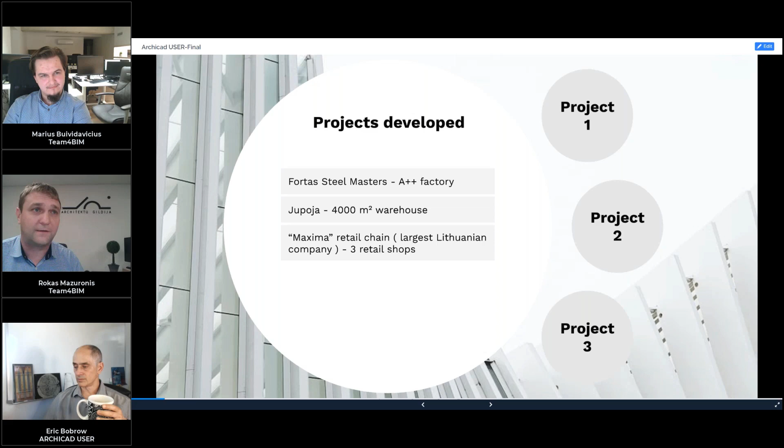This is just some basics of our use, we're not expert in that. Our company consists of two parts: one works as an architectural company in Lithuania, and another part called Team4BIM, which is why we are gathered today, provides drafting and BIM modeling. Our staff also take part in some of the Lithuanian projects, so they see in our office how those working meetings go, and they understand that everything starts with a drawing but doesn't finish with the drawing. I think that encourages them to get a better mindset. So these are some projects of our company that we did in Lithuania.

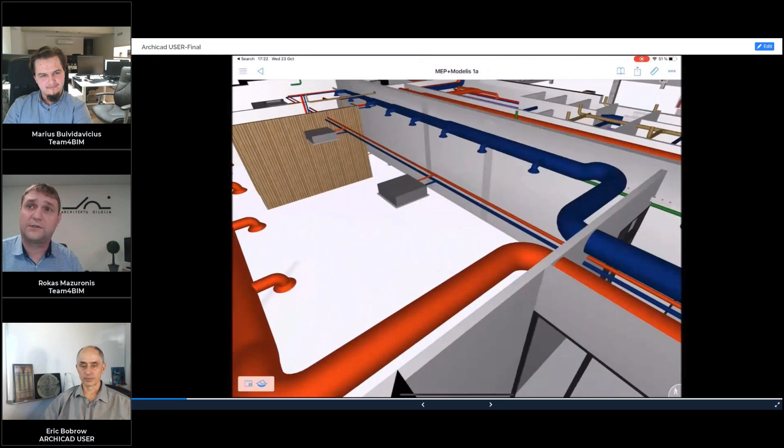We also use all these Archicad tools to implement them into the real world. For example, in Šiauliai, Lithuania, we built a manufacturing factory, and we also did an as-built model because many engineers used and worked just in 2D, they did not use Archicad or any other expensive software. So during that project management, we as architects received information from engineers and compiled it into one IFC file.

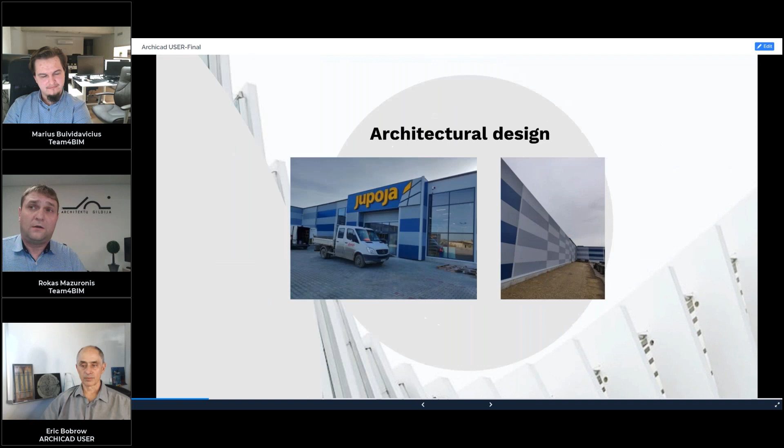So this is another of our projects. I just wanted to show that we are doing quite serious projects, big, a few thousand square meters, and we are using this software and these Archicad capabilities.

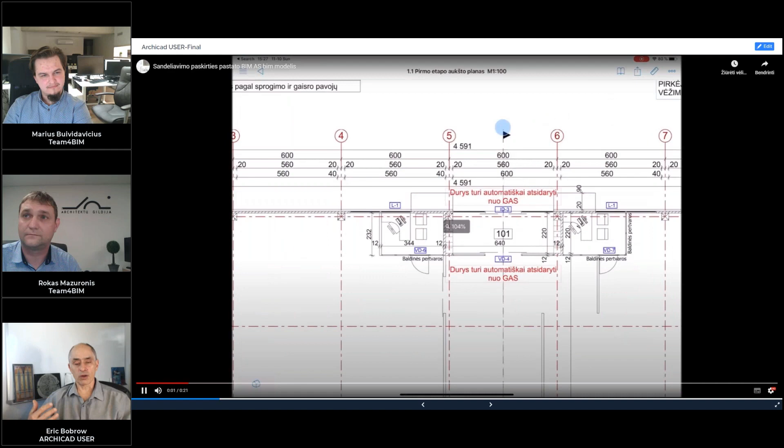Before you go on, I just want to point out for those looking at the graphics and wondering how you produce some of those things: some of what you're doing here is just available when you take your Archicad project into BIMX. Not all Archicad users are even familiar with the fact that BIMX exists and that it's included as part of your Archicad package. But the fact that you can go from a 3D view to a plan or elevation in a nice transition to make clear what the drawing is about, and even slice through the building interactively, is a wonderful part of BIMX, and it communicates the context of the drawings.

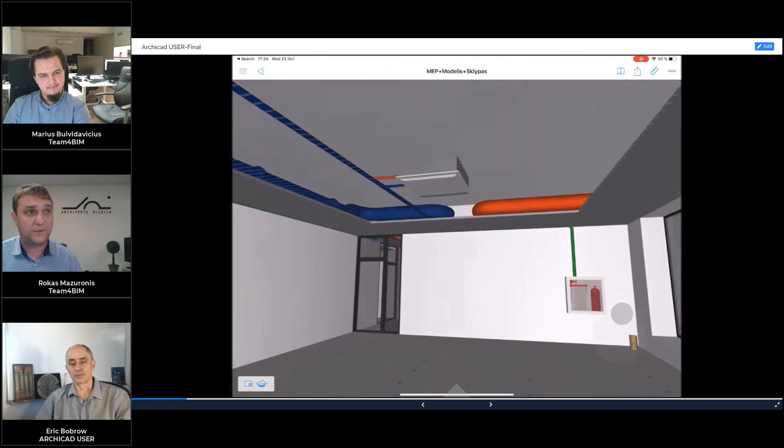For this example, we did that BIMX file and underlaid the original engineering drawings under this IFC model, so the client could see the original drawings which were signed by the engineer, and on top he could see that 3D model of all MEP systems with attributable information to make it clearer for him how that works.

So in this case, you modeled based on the drawings. The drawings had been carefully done by the consultant and were designed to fit into the architectural space. But then, as part of the coordination, you modeled the ductwork and things so we want to avoid clashes, we want to make sure everything is going to fit together.

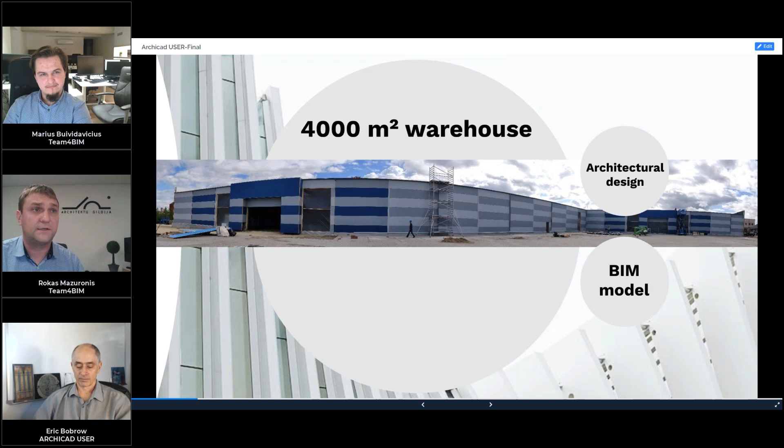Yes, because we wanted to gather the engineers who have the best knowledge and the biggest experience, but somehow they don't use very advanced software, and young engineers use software but have less experience. So on this project we tried to take more experienced engineers and use our own Team4BIM services to gather all information as a whole, and during construction, since we were supervising the whole building process, we also managed how those systems changed. Afterward, the owner of the building received that BIMX file with a brand new tablet, and he was very happy to have received all documentation in that form.

Do carry on, I'm getting a call from Patrick, he must be having a problem connecting up. Okay, hey Patrick.

So basically, these are also our Lithuanian projects. As an architectural company in Lithuania, the biggest retail chain is called Maxima. We are doing small commercial buildings for them.

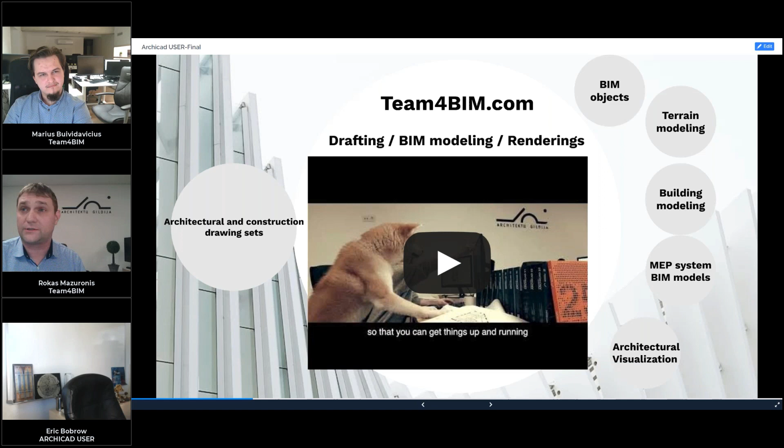As Team4BIM, the main services that we provide are objects, terrain models, building modeling, MEP systems, and also drawing, architectural and constructional sets. So basically, this is a short video of our company.

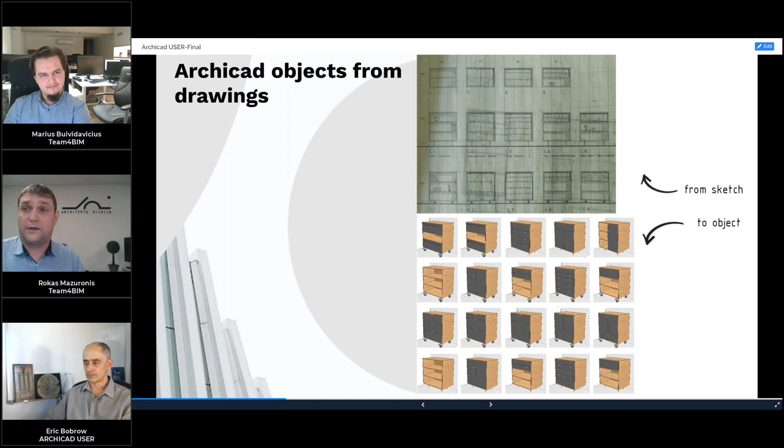So one of the services that we are providing is modeling non-GDL based, non-parametrical objects with attribute and material information attached to them. For example, we can model these objects from a manufacturer specification, or sometimes we also worked with manufacturers who wanted to have their object library in Archicad to provide it to interior designers. So we also created those models.

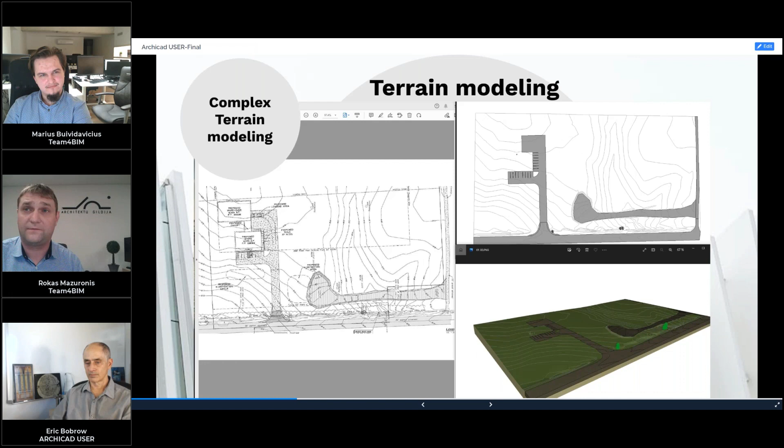Another thing that our services can expand capabilities and save time is terrain modeling. For example, we sometimes do terrain modeling just from scanned PDF files. Also, we work with architectural ideas, and then from sketches we attach pathways, drive-throughs, and in that case we can create really complex terrain models, which can be extremely time-consuming for architects themselves.

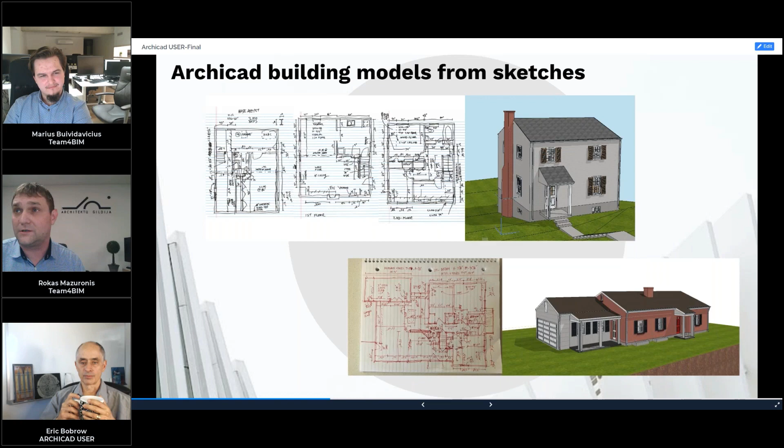We provide building models themselves, basically from sketches. The architect can send us a sketch, or even the person who wants to have a model of the building can send us a sketch with basic measurements. It can be in metric or in the US system, in feet and inches, and based on that we can create Archicad models.

We also create Archicad and terrain models from point cloud data, and we can also connect that point cloud, resample it, or if a client sent us an already prepared one, it's a bit faster.

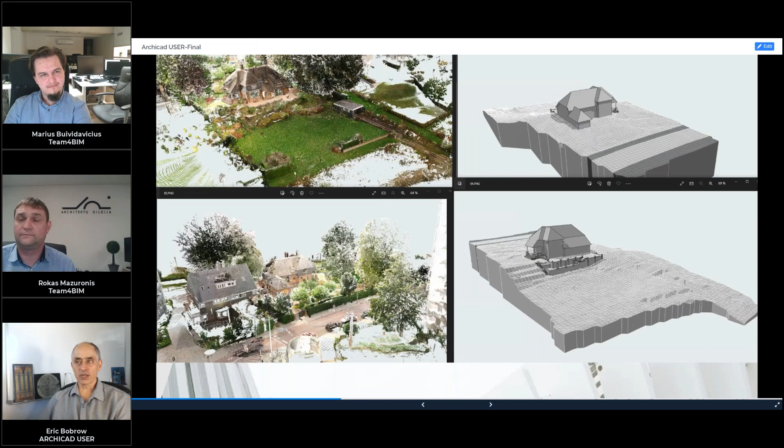Just a moment, I want to clarify for those of you on the call who don't know what a point cloud is. A point cloud is a collection of data that comes from a certain type of scanning. There are different devices that do this, but basically they all have in common: a device is placed somewhere, it looks around at the environment, and gets data about where the solid surfaces are. In most cases these days, it's actually giving color, saying this is brown, this is black, this is white, etc. Now that point cloud is basically just a bunch of little dots, and you can see in the upper left here, this thing that sort of looks like a pointillistic, impressionistic painting, much like the old, well, not surreal, but pointillistic ways of depicting something in painting.

Now you can actually move around these things because it is a 3D model. They'll typically take multiple viewpoints to get a more complete scan of all sides, but it's not solid, and it's not something that you can actually get drawings from.

So one of the things that is required is either automatic, with some tools, but more manually, just a service, whether it's your own in-house team or Team4BIM, goes and traces this and makes an Archicad or BIM model that actually closely matches what the as-built conditions are.

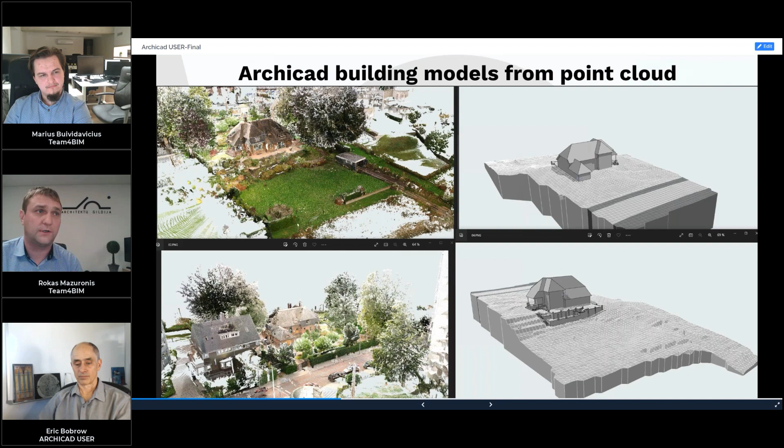Sometimes there's a need to have a model based on old blueprints for renovation, historical reconstruction, or even for building maintenance purposes. So we do models for these types of things as well.

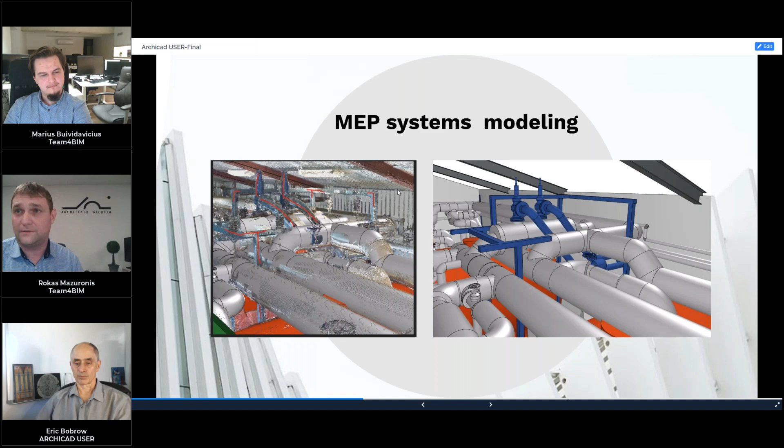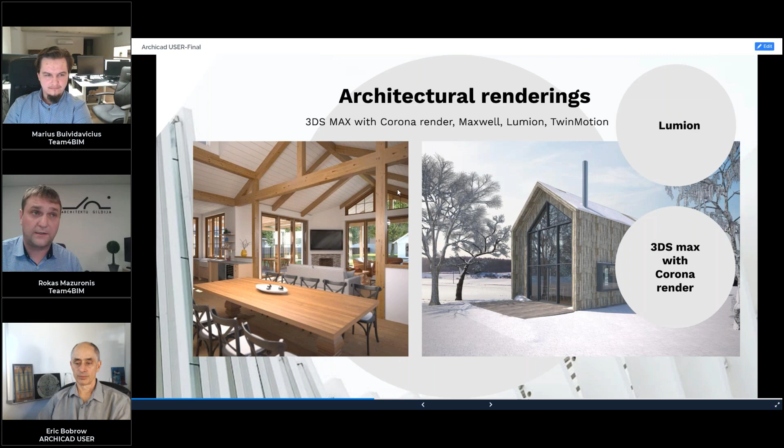Another layer of our services is producing renderings. For daily renderings we can use Twinmotion or Lumion. Usually when a project reaches more finalized stages, it requires a higher quality of rendering for marketing purposes or final presentation to the client, so we also provide renderings with 3DS Max and Corona render.

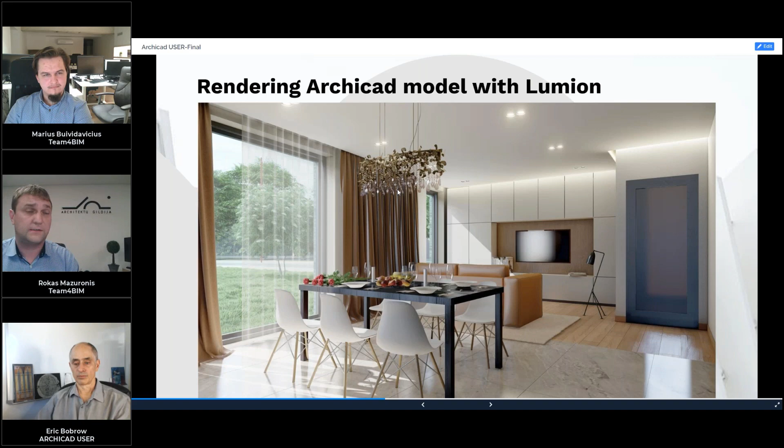As people work with our company, we can help them expand their scope of software beyond Archicad and Twinmotion on a daily basis, compare results, and choose the end result that's most suitable for them.

And also based on those models, as a final stage, based on architectural lead architects' input - because I want to underline one main thing: on these projects, we are not working as architects and we are not working as engineers. We are working as an additional part of their team who helps convert their ideas and proposals into modern Archicad, Revit, BIM files - this is our architectural and constructional drawing set.

Also, as we create the model, if there's a need to model it further based on the red lines and sketches of details that we receive from architects, we can also develop annotated and finished drawings. And I'm very happy that we had...

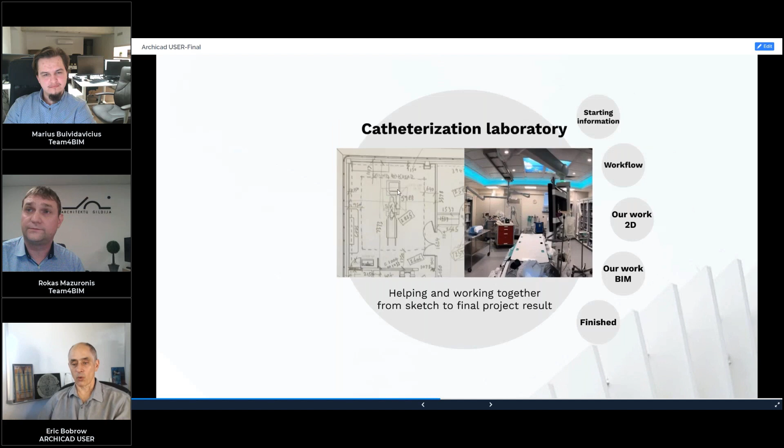Yes, I'm back. Yes, I've worked very successfully with Rokas and his team for a number of years, and that worked exceptionally well. He's brought up a project here that I was going to talk a bit about, and show some pictures of later on. So yes, it's been a very good working relationship over the years.

As Rokas said, it's a team approach. His team there, I saw them as my team as well. As we worked on projects, it wasn't a matter of outsourcing something to somebody else to draw with little involvement - there was a dialogue backwards and forwards, just as there would be with any staff member working in your office. Just because the office is several thousand miles away made no difference whatsoever - we're still able to communicate exactly as we're communicating now with things and drawings, so it worked exceptionally well.

And Ian, I want to point out that the huge distance was not an obstacle to visiting us also and meeting directly in Vilnius.

Yeah, we had a couple of visits over in Lithuania for business meetings to discuss work, and you introduced me to using VR a little more, which worked very well. The face-to-face meetings were very good for me because there was a local airport I could get to in a couple of hours. Now they've shut that airport, it's a little longer, but hey ho, Brexit has its problems.

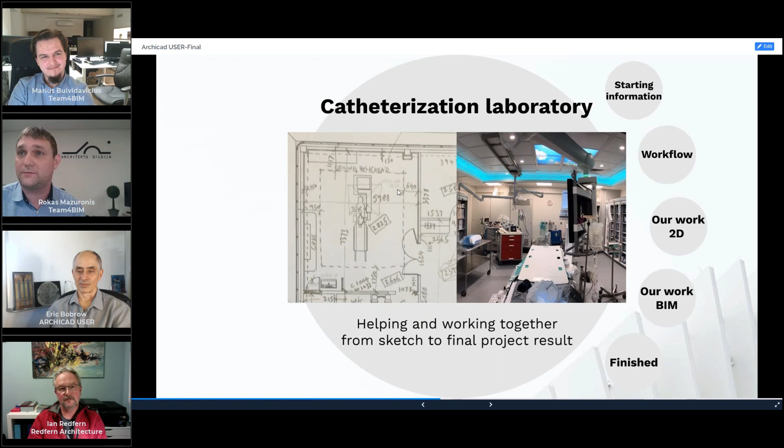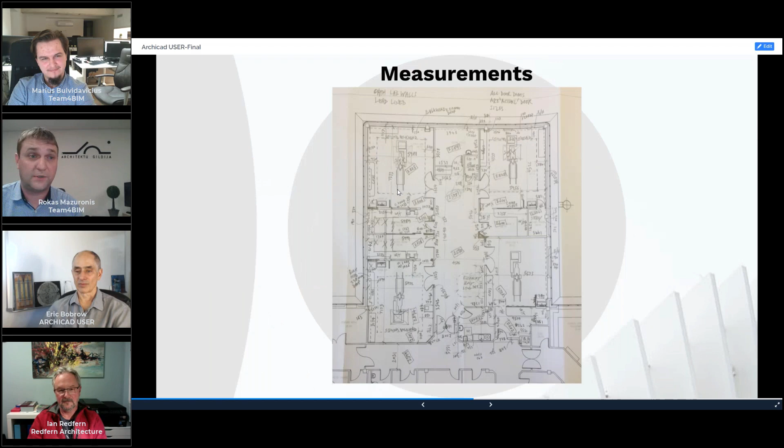So basically, as we worked with Ian, we received some starting information from his side - photos, sketches, measurements, 2D drawings - and as Ian pointed out, we worked as a team, as an expansion. He helped us, we helped him, it was mutual communication. At first there was maybe some learning curve, as in every partnership, but after that we managed to move a bit smoother.

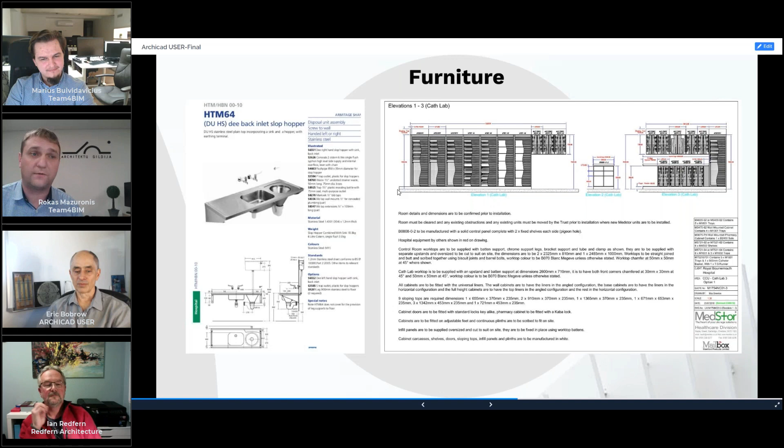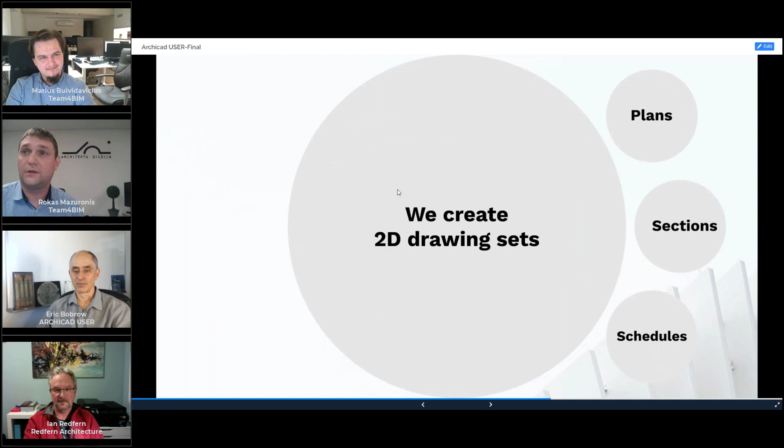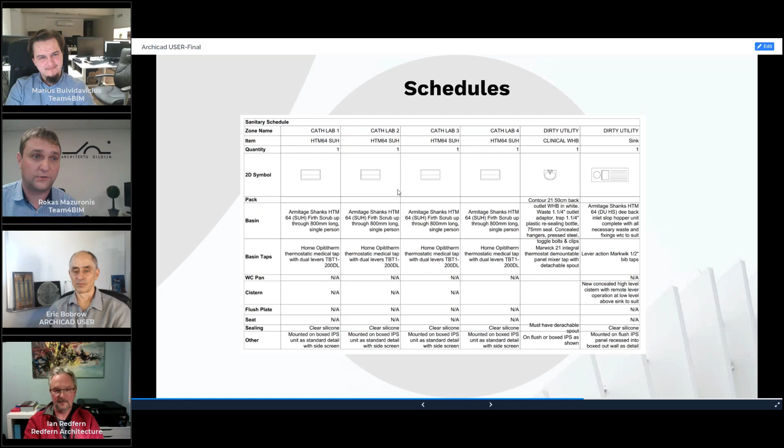We also received information about the equipment that was used, and did some modeling of that equipment. As work progressed we got pictures and equipment drawings, and based on that information we created plans, sections, and schedules. We also created a BIMX model for one of these projects, where you can go through all this quite heavy technical equipment and see it. We're very happy that Ian sent us a picture of the finished project, because it looks very nice.

By the way, it's very odd for me to see this room, this medical facility, because 1.5 years ago I had a heart attack, and they rushed me to the catheter lab, which is this type of room. Even though I was in California and this one is undoubtedly in Europe, UK, it looks very familiar to me because I was in it. Of course, I didn't see all of it because I was being wheeled in and wheeled out, but I recognize some of the features.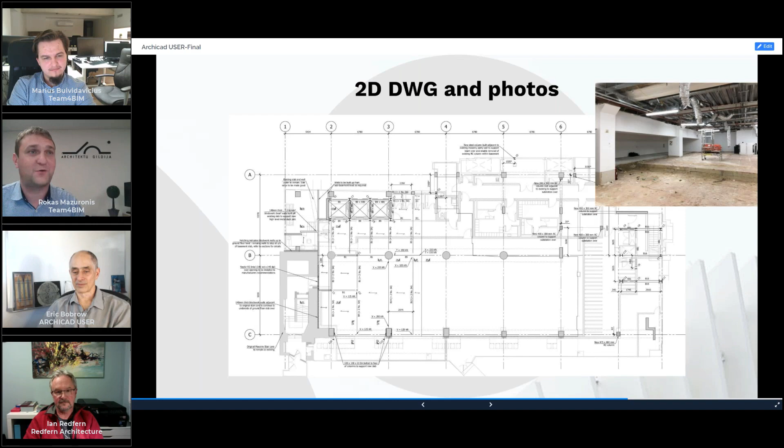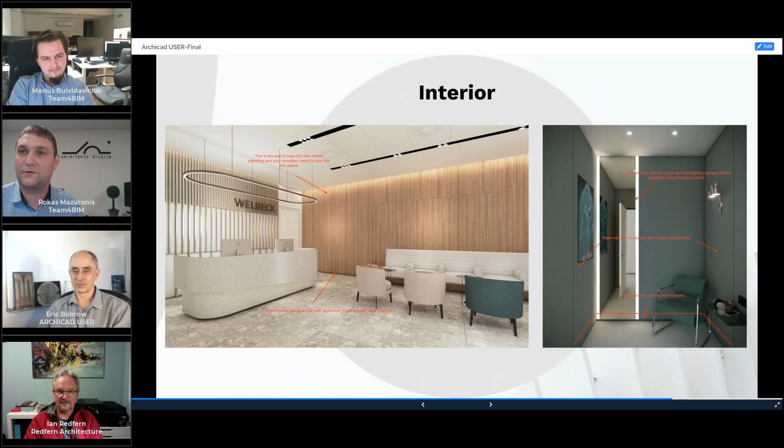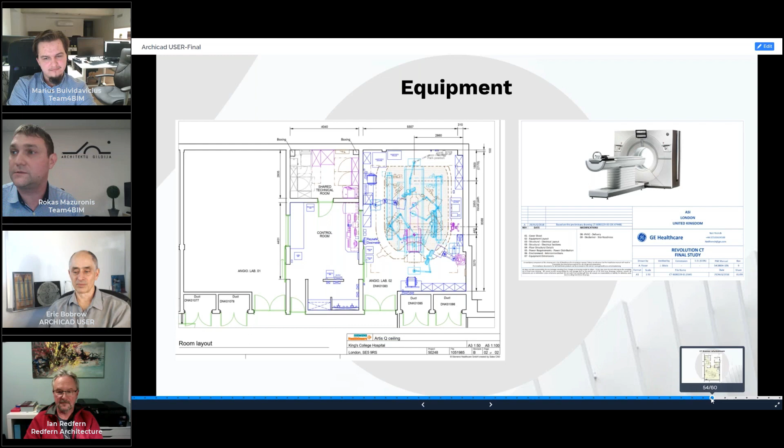We worked with some other projects too, but the principle was the same. We received information, did some modeling, drafting, communication, meetings, and worked under strict supervision of Ian. We received red lines and notes, and gathered all the information together. We also gathered information from interior designers, and based on that, did modeling of some equipment. This was our work in progress.

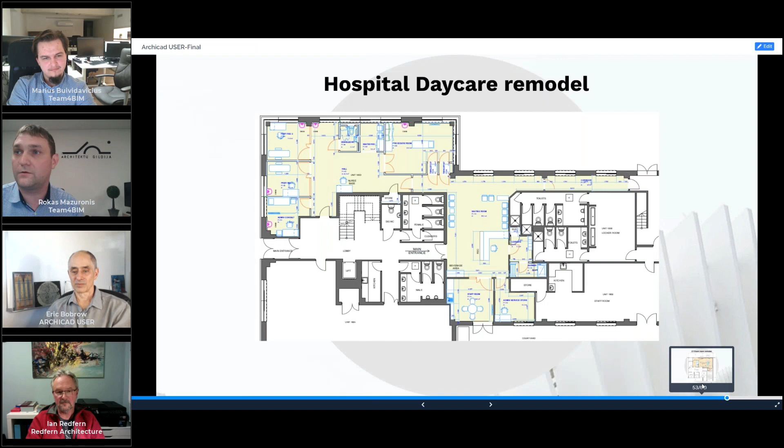We also produced the BIMX file where all the drawings are, and we had the whole list. I believe we had 11 or so projects.

This project, as an aside, working with Team4BIM, was an interesting one in terms of working with drawings—it makes you realize you cannot rely on information. I know you've talked about point cloud things, but I'm always a firm believer in double-checking. This job was originally drawn with a pair of Siemens scanners, 1.5 Tesla, sketched up by Siemens for their scanners fitting in. When I went to site, it was based on as-built drawings in CAD format for the project. But the building was actually 4 foot narrower than it showed—not across the width, but in the north-south direction on that drawing. That made a heck of a difference to getting the scanners in, and it was highlighted straight away by Rokas's team, saying something was amiss. So we double-checked dimensions, then went through a process of redesigning, redoing the sketch schemes, and shrinking it to fit.

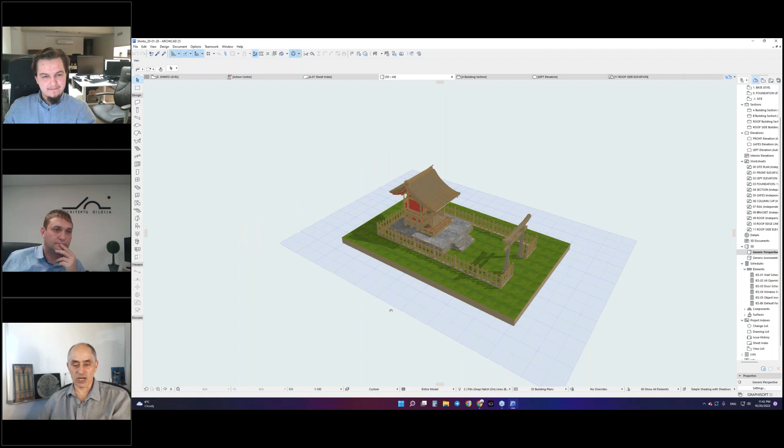I need to find how to share that. Okay, well we're seeing your desktop right now, with the sort of sci-fi looking scene. Can you see that? Now we're seeing that ornate sort of looks like a Japanese type of pagoda, at least from mine. Exactly, exactly. So this is just for the beginning, until Ian comes back, just a short story, maybe a little bit of showing off.

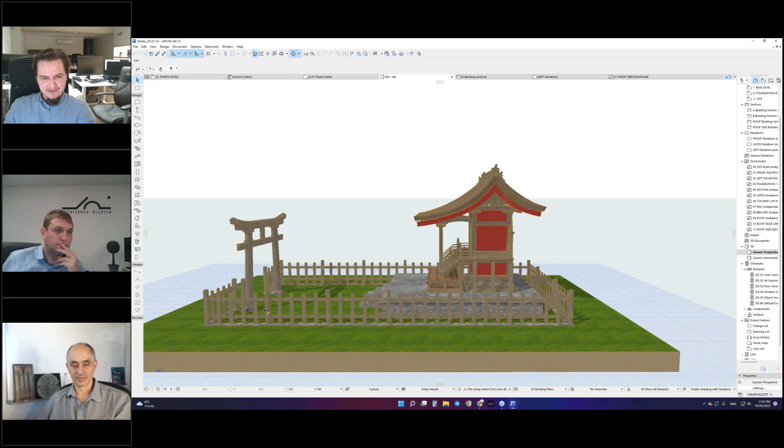This was made maybe two years ago from a hand-drawn drawing, and we were asked to do it as accurate and as detailed as possible. So we went with that, and it came up pretty well. You can see all of these details. This is one of the most pleasure-giving works, working on the details, since not all professional drawings are needed to work and make results the client would be satisfied with. So yeah, this looks like a fun project to work on.

Did you have anything else you wanted to show, Marius? No, basically what we have to show, like the common description of what we can provide, was in the August presentation. So if there's a chance, I will catch up on any questions if there are any.

Okay, so your role, Marius, is you oversee the project delivery for clients for all of the outsourcing at Team4BIM, is that right? Yeah. Okay, excellent. And there are a couple of questions.

So when Ian comes back on, we'll have him connect up. See, he might, I have to see. Okay, yeah, I'm not sure I've cracked this actually, so I don't think it's going to work. Let me quickly just see if I can make you a presenter. If it does seem to.

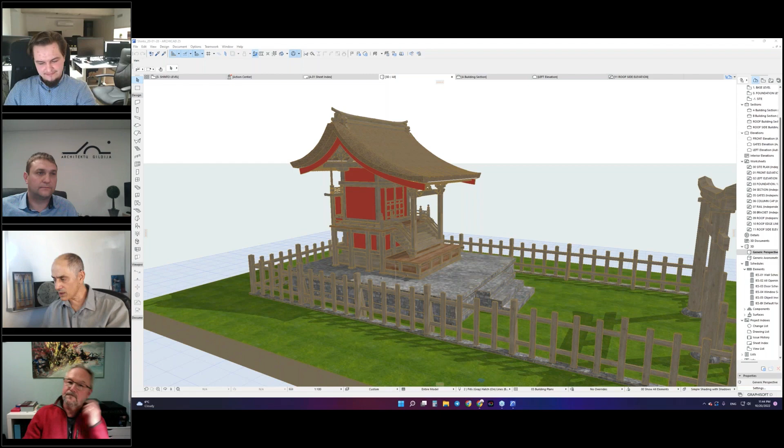So Ian, let's see if you have the option to share your screen. Oh yeah, show my screen. Is my screen on now? Not yet, you have to probably confirm it, like go ahead and choose which screen. Yeah, I've clicked the button on the screen sharing, and I've said share my screen. Start. Nothing happening yet, I'm afraid. Start or pause, so start. So I've got the start button on there. Is anything sharing on there? Can you see my screen?

Okay, well, if it doesn't work, then we've certainly learned about your work with them. So is there anything you want to say verbally, just related to it? Yeah, I think we'll drop that screen sharing.

What I was going to come back on was the information that was sent through. Rokas showed some pictures there of my scribble surveys that I do, which are hand surveys. Some are legible, some are not, and sometimes we have to go backwards and forwards to get that right. But what I found was very good and very quick was, because of the quick turnaround from Team4BIM, if I'd been to site, I would use an iPad quite a lot. I'd take a photograph of existing drawings, or even a photograph of equipment on the walls, things like that, and I would annotate that photograph, save the image, and then bounce it across to the team so they could use it and start working up the drawings.

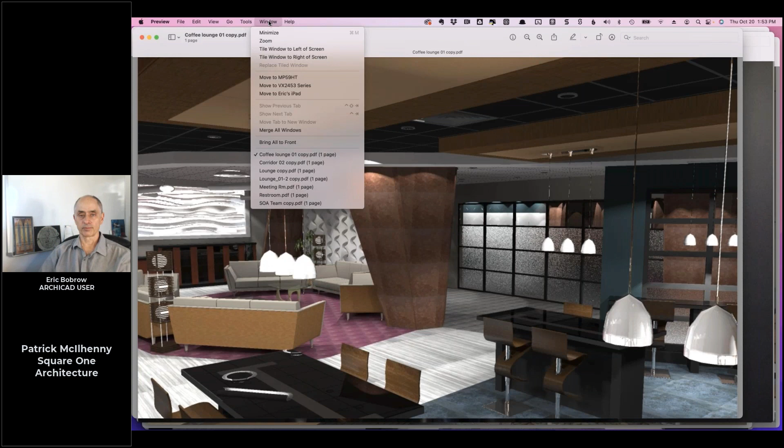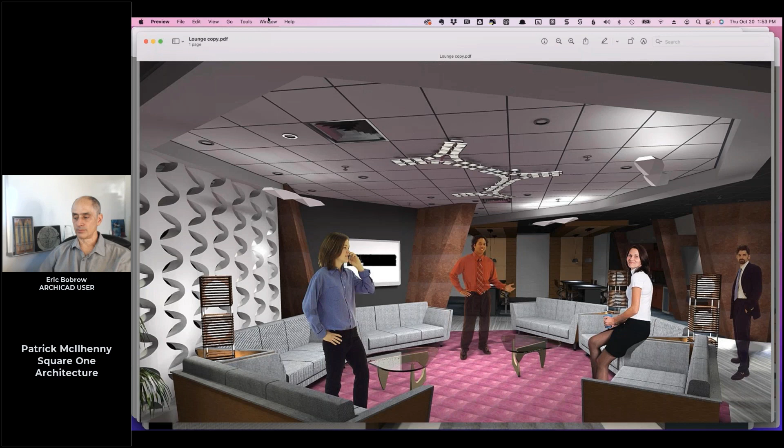So we typically do work like what you're seeing here. Most of the work we've done over the last 20 years has been with existing buildings - very few are coming out of the ground in this area in Southern California. So what you're looking at are concepts done by Rokas's team, and he's done such a wonderful job. Most of everything you see, except for the bodies, is pretty much very close to what you see in these pictures in the real thing now.

It gave us a very good comfort level with Rokas's team, because he had people working for him that were very fast and very thorough. So I have all kinds of accolades when it comes to Rufus. Now, these are all commercial projects. I know you mentioned you do a lot of medical and science facilities - is that right? That is correct.

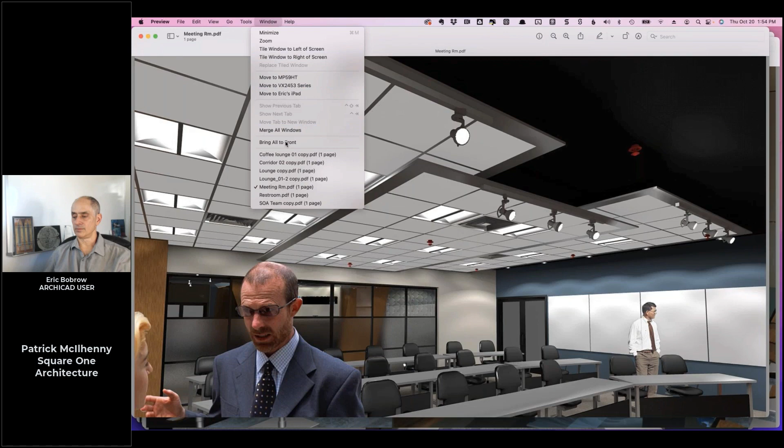So these are all training rooms that are being utilized. This happens to be in one building - about 180,000 square feet. Oh, by the way, I thought this was very unique for the owner.

This was a typical restroom in a cluster of restrooms found right next to a second-floor facility that included a working-out gym. What I thought was very interesting is I explained to the owners, well, we do have to have a curb-free shower, and he says, no, we'll make them all curb-free. So he just likes to have everything smooth and clean.

So unfortunately you can't see that here, but this again was a concept that was done, and it's almost identical to what is there today. What's your privacy screening in there, or is it one-person use? That's actually - you see the door, that's the privacy screening, you see it in the mirror. Okay, so basically this room is only for one person - not like one person that's going to be getting that sweat off of them.

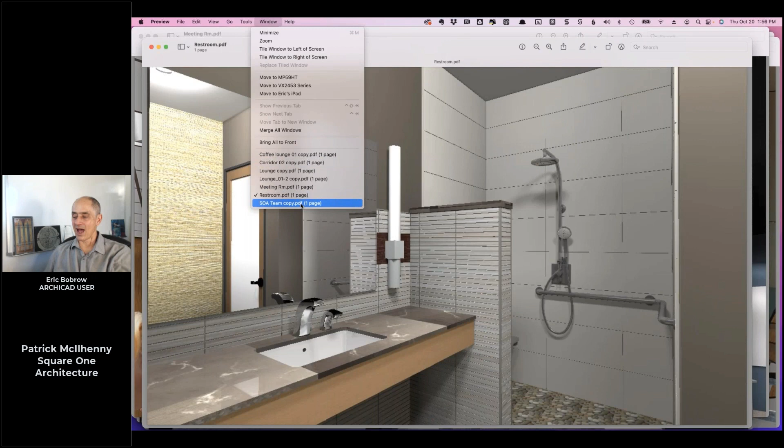But there's one other thing I think is important, a lessons learned, since you may have people from around the world watching this. When it comes to paying across borders, especially overseas, we found it very beneficial to go through PayPal.

We did not use the banks. We tried using the banks one time, and I about flipped, because I was paying the bank the same amount as we were paying Rufus on our very first project. I found out not all countries use PayPal, and very few small businesses have never heard of it, but the point is there are no outrageous fees.

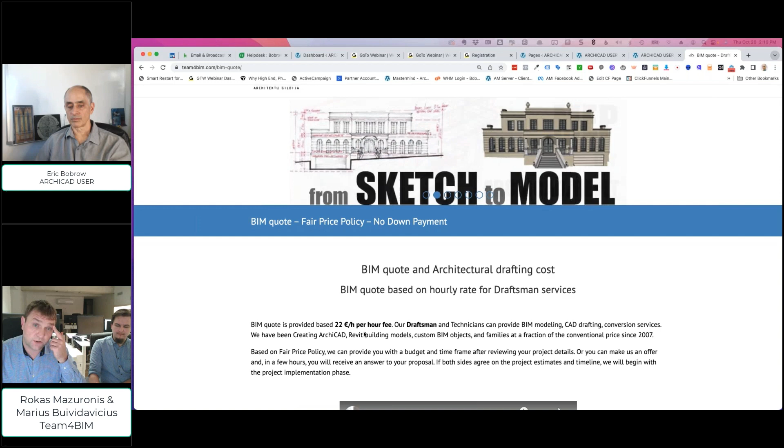I think this is a very attractive position. You've got an hourly arrangement, and you'll even get started and do the first week of work waiting for approval. You won't do a second week without it, but if you feel a client is a likely good match, you can just get started without even sending any money, which I think is more than generous.

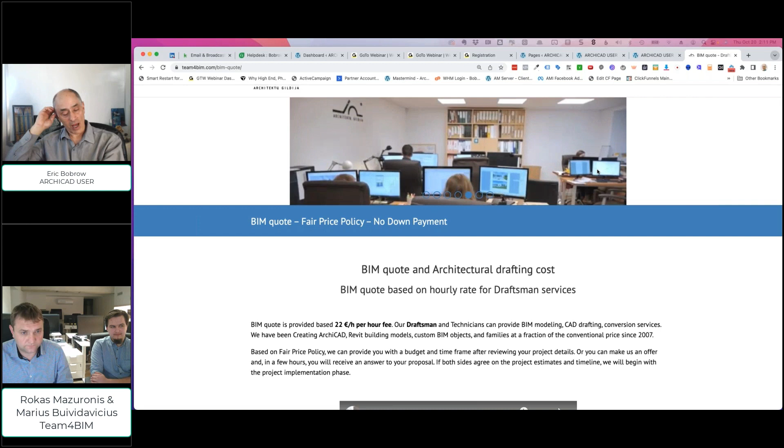Now, in terms of how many clients you've worked with, you've worked with over 300, you said 360 clients so far? Yes, on bigger and smaller scale projects, we've worked on about 360 projects, and those companies we work with on a constant basis for many years, we have listed about 30 companies.

Let me see if there are other questions that have come in. Dave Norman is asking: when exchanging Archicad files with Team4BIM, how do you coordinate different layer schemes, building materials, etc.?

It depends on how we are sharing the files. Usually if there is teamwork, even if we host the server, or if it's done by the client, all of the data links to the file will be included through the server. If we're sharing files offline outside of teamwork with PLA or PLN files, it depends on the size and what is more comfortable for the client. Usually we ask for the client's library if they have any specific ones. Even in Europe, international companies have specific country-based libraries, which might have the same textures or objects but with different, language-specific names. So if we're using a different library, it might not be visible to our client. In such cases, we ask the client to share their libraries, and if possible, we use that and adapt to the client's needs.

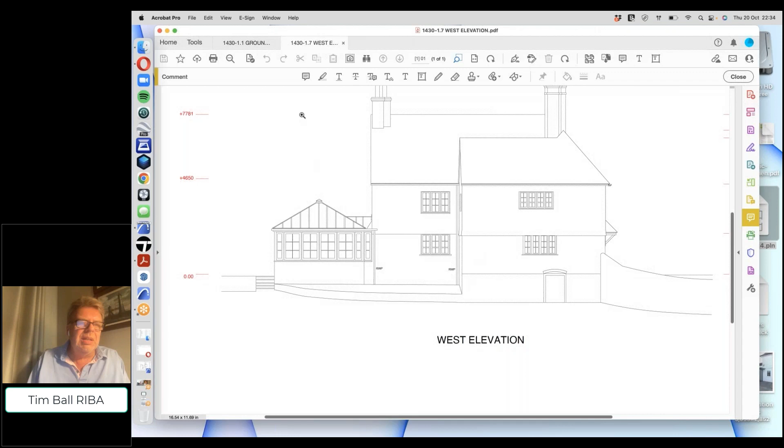That gives you an idea of what they actually do. Now that was the elevation - we could see just a part of one wall that was on a skewed angle. That was interesting, and then I saw on the plan it actually was skewed by that amount. Of course, historically things might not be square.

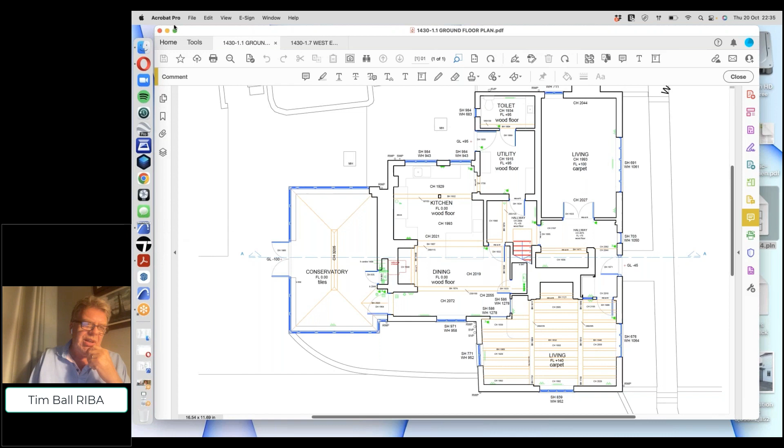Actually, I was going to show you another project - it's closed, don't worry, so that gives you an idea. So really what I'm sending to the BIM guys - I've got a project here that I pulled out of an archive because I've got pictures of the finished building. They would take that 2D survey and create an Archicad model from it. This is a floor plan.

They'd also give me an as-existing elevation. What I then do, using the renovation filter, is basically create my own floor plan where I'm adding - we put a whole load of stuff in here. And I also create the proposed design - this is actually where there's a very minimalist infill. Can you just go back between existing and proposed in this view, just so we see the difference? Or you can just double click on your view.

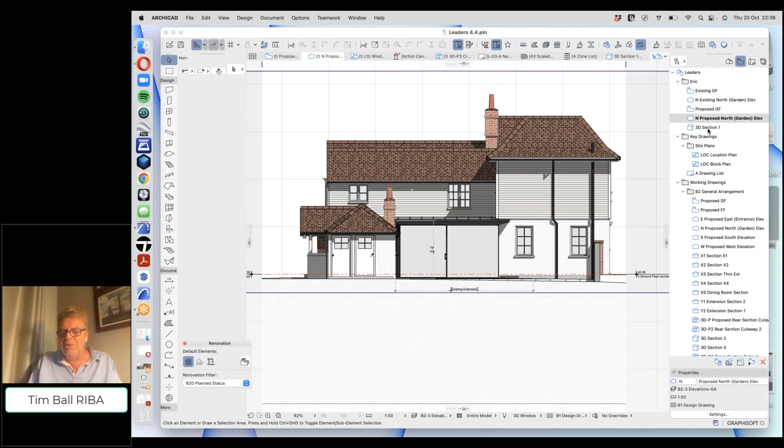Okay, so now, because when you went back to plan, we couldn't really get it. And the reason I spend so much time modeling these things is because when you're actually trying to explain, to get consent to do something like this, you have to really explain in huge detail how it works and how it fits with the existing building. This one, for instance, there's a cutaway section that shows the way I approached the design of this particular building, because the most important part of the existing building was actually this element here.

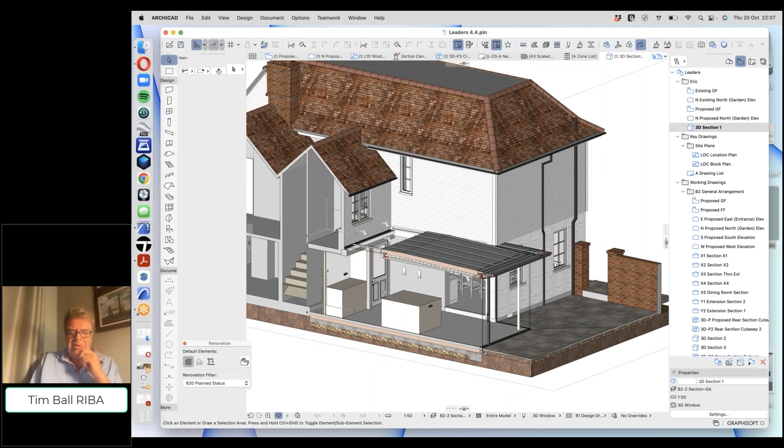So I was able to model it and create a glass roof there with a flat roof here. That way, when you're inside the building, you can actually look up and see the old historic element there. And the planning officer loved that - they turned down everything else we tried to do here, but they loved that and said, there, you can have the consent for that. And I think here - I found it, where's it gone?

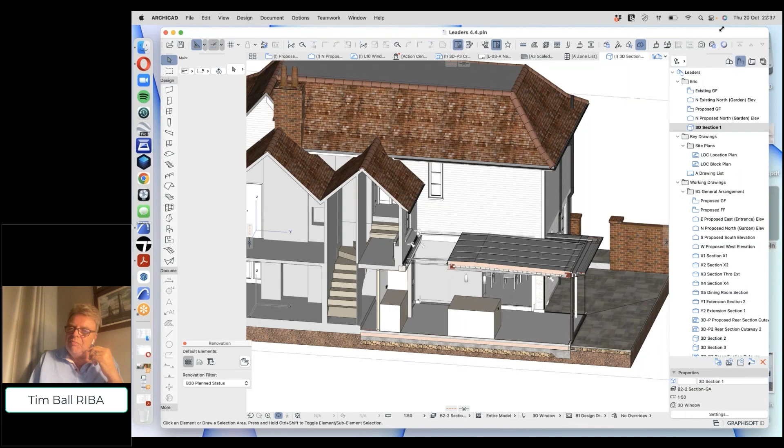And that's actually there. That's what it looked like when it's finished. So that gives you an idea of what they've got done.

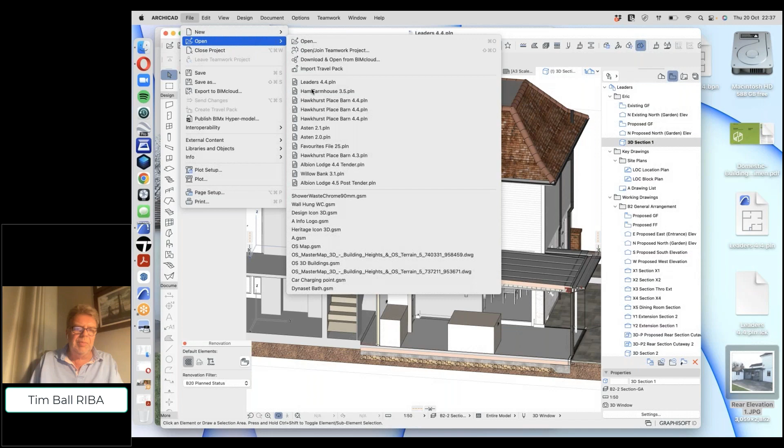And if I open, I think I've got another one. I just opened another one that they've just been working on, just to give you another example.

This is another one they've worked on for me recently, which is a little bit more complicated.

What we start with is something pretty simple, you know, a floor plan. The color coding is because these elements are more recent than the original grey ones.

What are the little symbols that look like a Parthenon? Ah, you know what I'm like with data. That's another half an hour to talk about that, Eric.

So that's a 2D symbol that you put some data into for the schedule. Yeah, so I'll show you that in a minute. So basically, you've got the existing plans.

And an existing elevation. I don't know why it takes so long to regen this one. This is in version 25. It should be all right.

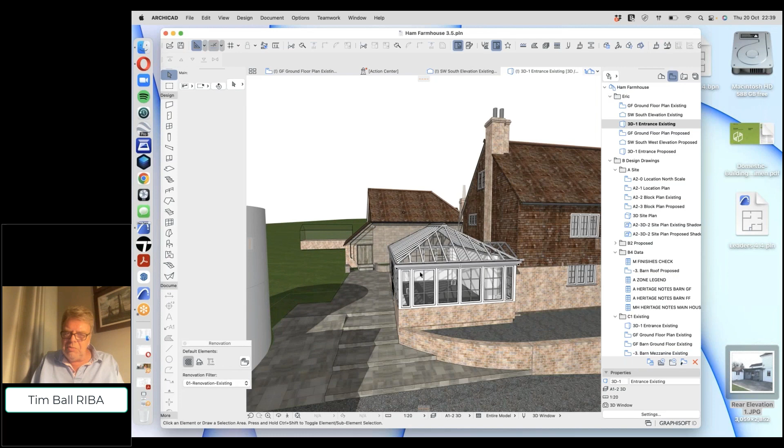So you get that. You can then say, this is the part that I'm actually going to work on, because what we've got is this horrible 1980s conservatory that people put on their buildings in the UK, so Rufus and his team modelled all of this for me.

So this is a pretty complicated building, as you can see. And they're really good at actually looking and getting all of these details right.

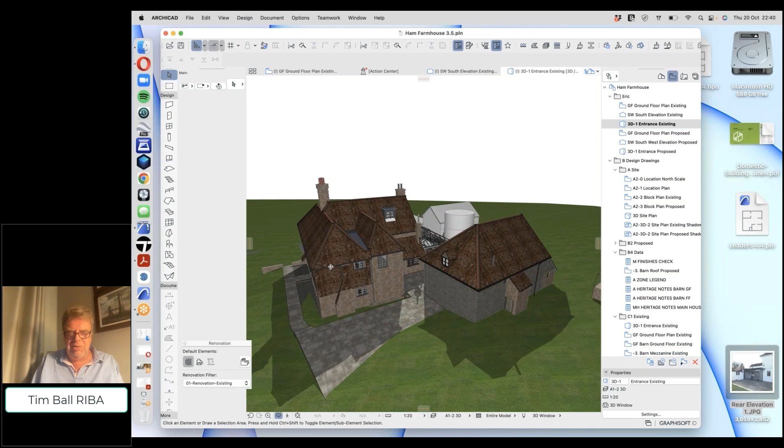I help them out a bit sometimes with getting the finer detail of the materials and just little things to do with little external walls and things like that.

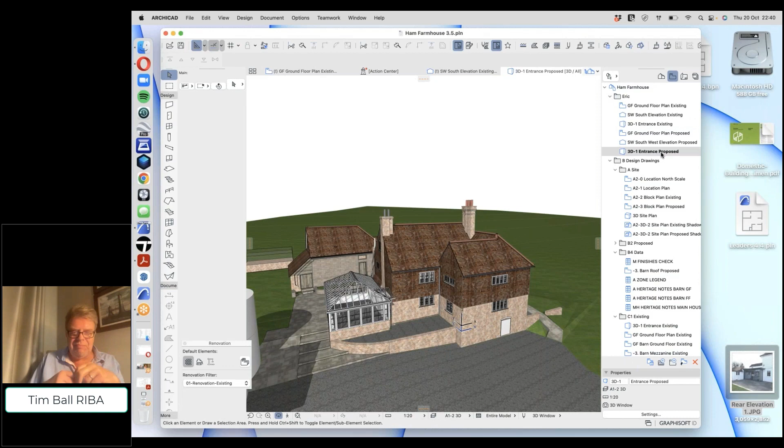But what then allows me to do is to actually demolish that, and instead we get that.

So, you know, this bit all over here is all still the same. I've used the renovation tool to do something. There's something missing here, which I won't bother to go into now.

That again allows you to do the comparisons of what you can do. But it's great because they save me an awful lot of time by just actually, I can rely on them to make sure all of that works.

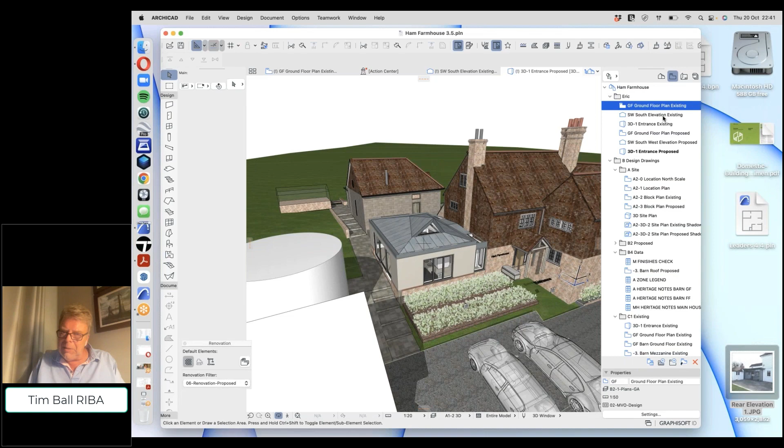One of the things that I do, there we go, I think we can do it here, is we can use the trace, because what they generally do is put down here, I've got it, yeah, here we go.

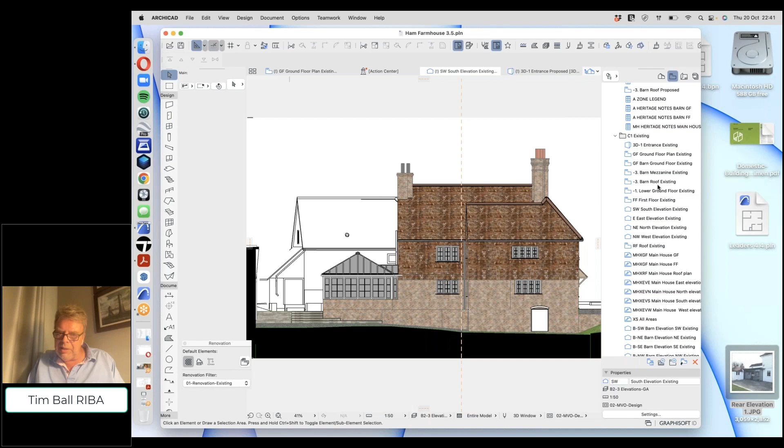What they've done here, Eric, is that one, I think it is. So they've taken the survey drawing I gave them, and they've put it into a worksheet.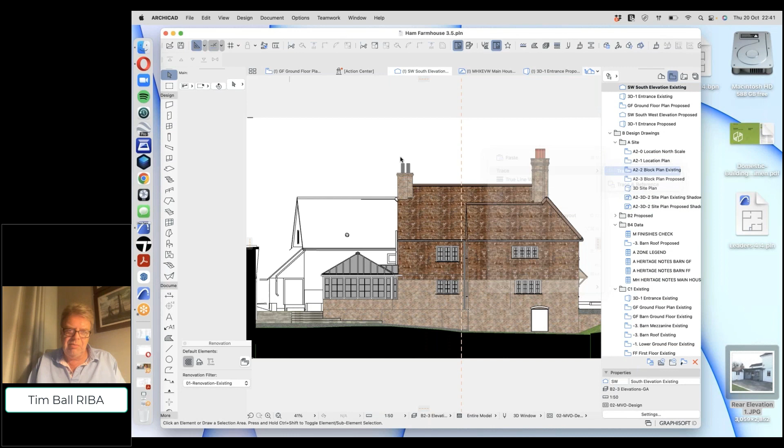And what that then means we can do, to check what they've done, is we can trace reference that into it, like that. Actually, I'm not sure that is the right one.

Yeah. So there you can see that they've taken, I mean, that's the way they work. They've taken the 2D DWG file, and you can check the whole thing very easily, and they do that as well.

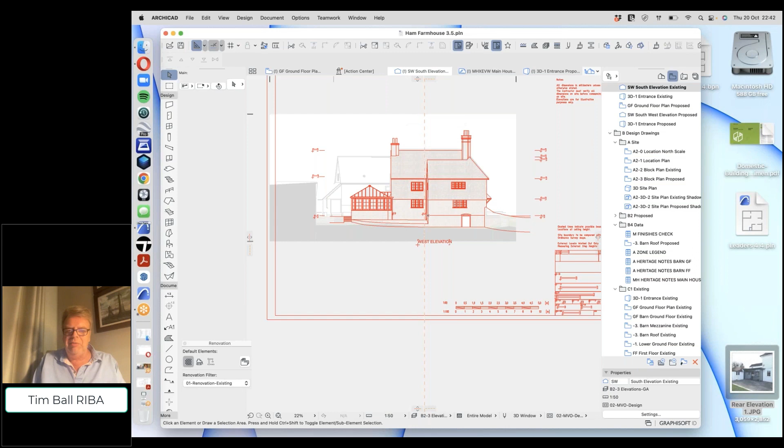So I look at this all the time, but I've never found that they've missed something or anything like that. But it's actually a really neat way of using the trace reference tool to check whether the elevation is correct or not.

Right. Tim, we're running late here, so I'll give you a couple more minutes if there's some other things primarily focused on your work with them.

It seems like you rely on them to accurately create the as-built so you can focus on the new design. That's right. And unlike a lot of the other architects who talked to you tonight, I don't use pencil and paper anymore. I just design straight into Archicad, and I've been using Archicad for so long.

I started, I think, on one of the versions 4. I can't remember which one it was, but I can draw in Archicad pretty much as fast as I can do it with pencil, because I'm just doing it so quickly.

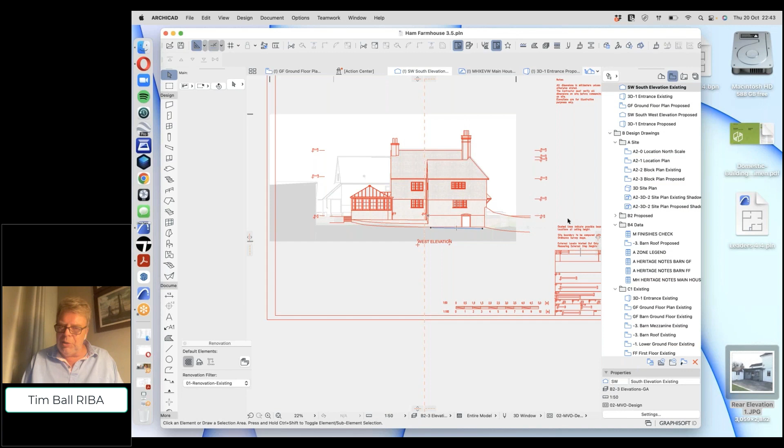You asked earlier about those heritage notes. There's a thing there to do with heritage notes, and I think that they're on. Where are they on? There we go.

So when I'm presenting this to get approval, I'm basically creating a sheet like this, where I've got as existing on the left, proposed on the right. But what I've also got is a schedule here.

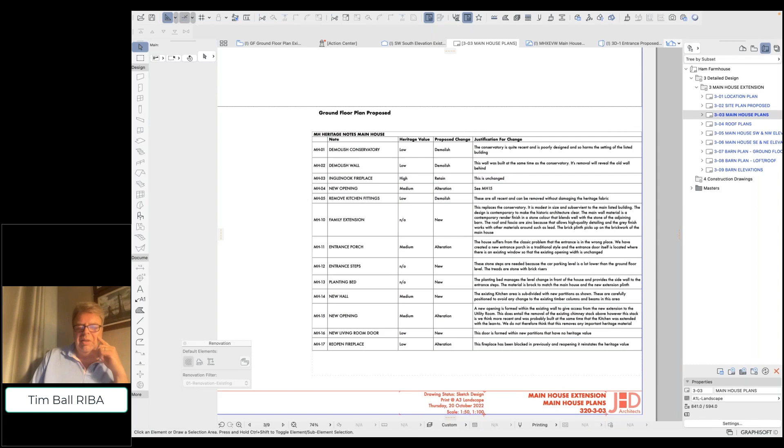So this schedule is actually pulled from those. Those are actually just 2D objects. I've got a 3D version as well, which I use in BIMX. That's pretty cool, because you can have a kind of avatar floating in the middle of the room, and if you click it, the info gives you details about it.

Just to make it clear for people, go to that schedule, open the source of the schedule. Just follow my directions, Tim, I think you'll know where I'm going. So now click on any one of those that you think would have an avatar, and then open the source view, open the source element.

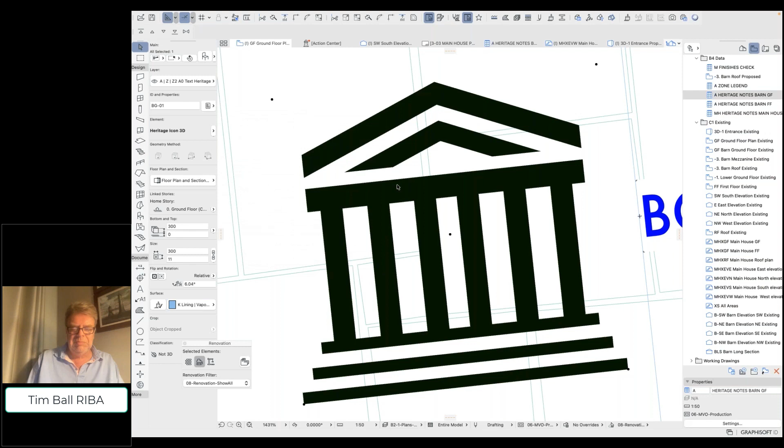Normally, when you select something in a schedule, it'll show you the window, the door, or the piece of equipment that is in the schedule. This actually is a 2D object that has some fields. So just open up the actual dialog. You go in there, and what I've got is a main property called heritage, with sub properties for note, heritage value, proposed change, and justification for change. It's just properties, I've been using properties for years.

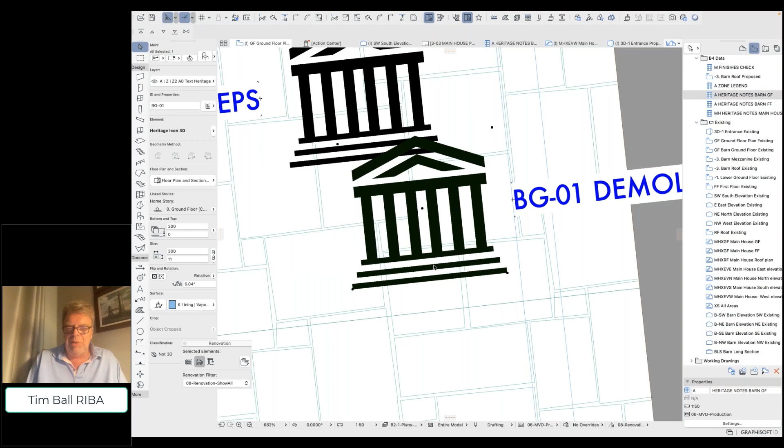Schedule shows what that is showing on the schedule. So there you can see the note that we were just seeing on that element is what's showing up in the schedule. This is something we've spent some time on, you've shown it in some other Archicad user things. It's quite clever, because we're so used to putting notes in schedules for windows, doors, or equipment, but this is actually doing specification information using 2D elements in some cases just to get it into the schedule.

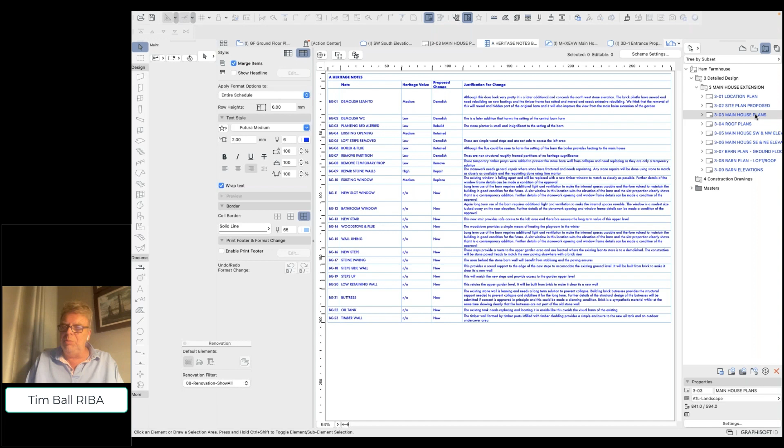Yeah, exactly, and it's just whichever's easier. But what it means is that you also can then pull the whole thing together. Everything is in Archicad. So you're able to say yes, the house plan's there, everything you need is in there. And of course, you can repeat the same idea with the elevations as well.

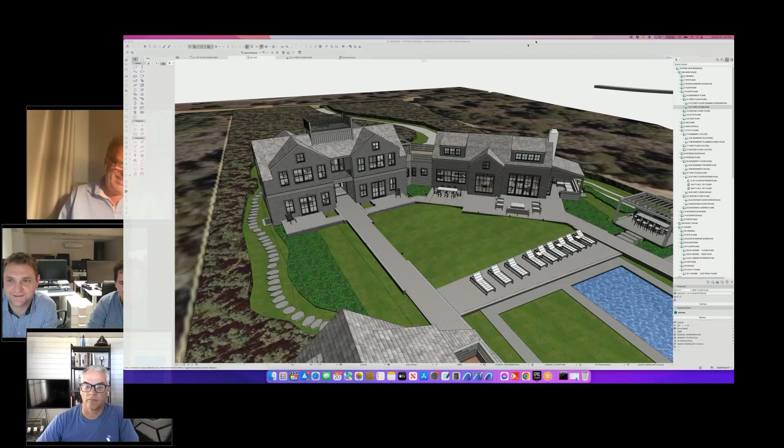So you're based in the Santa Barbara, California area, and you do residential work. Tell us a little bit about your work and then how you've been using Team4BIM. I can't hear you, so you need to unmute, but there you go. Okay, there we go. Hey Chris. Hey, how are you doing? All right, good. Yeah, I'll give you a quick overview, kind of specifically how it relates to working with Team4BIM.

As a background, I've been working with them for about 6 years, maybe even a little longer. At this point, I've always been small. My largest, I had myself and 3 employees in-house, and at that time I also used them for additional help. In the last couple of years, it's been just me, and I've continued to use them off and on. Frankly, I'd like to use them more, and that really goes to maybe some of the tips and tricks of working with them well.

One thing I'd say right off the bat is that working remotely, at least for me, requires that same transition that probably a lot of people have gone through who've gone from solo practice to having employees, which is you've got to take time to prepare the materials to provide to whoever's doing that work. In terms of how I set things up, specifically, I do this for all projects, but it's specifically important for working, in my case, with Rufus and everybody there - I always use teamwork. I use it even for the projects that I'm mostly doing on my own. But that means they have access to everything - the libraries, all the data, everything. It's always updated.

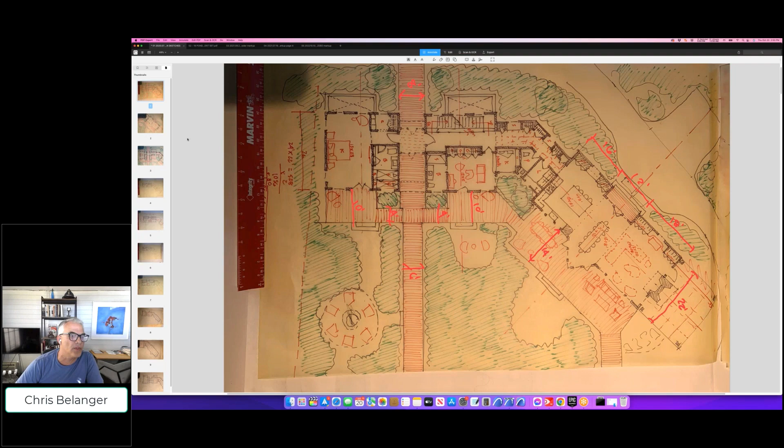This on the screen is a project that they helped me with right from the start. They created the mesh. I did exactly what I was talking about—I threw a few walls in. I think I did the perimeter walls on this and then gave them a sketch along these lines with some dimensions added in. These would go to them, and then I had them block out the interior walls, and we keep iterating from there. At this point we're working on various pieces at different times.

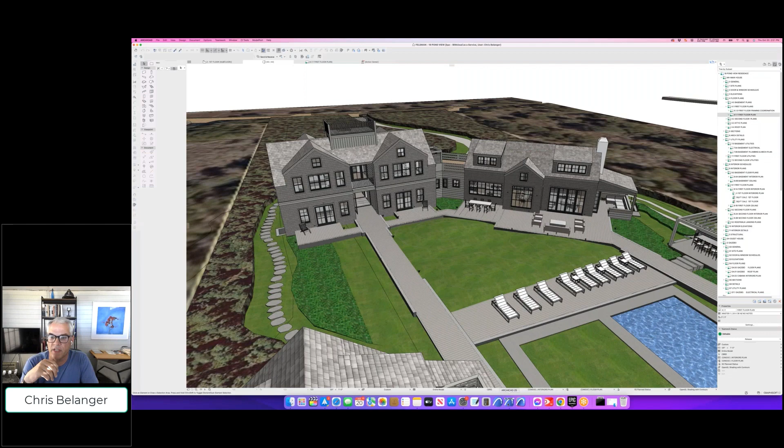Just the other day, I found these models of some light fixtures the clients are thinking about using. They weren't in an Archicad format, so I sent them off, and they manipulated them. They were able to convert them, and then I brought them into Archicad this morning myself to place and tweak.

Like Tim, I design in 3D. I do some paper sketches at the very beginning and occasionally work out a little layout, but a lot of design is in 3D, so I do tend to rely on them for things that can be described easily or don't require as much design work.

So moving to another file, here's a markup modifying some things. I would send something like that to them. I'll take a 3D view that I have, and I had already drawn this paneling in some other rooms, so all the detail was there. This just gives them an idea of where we're trying to go with it.

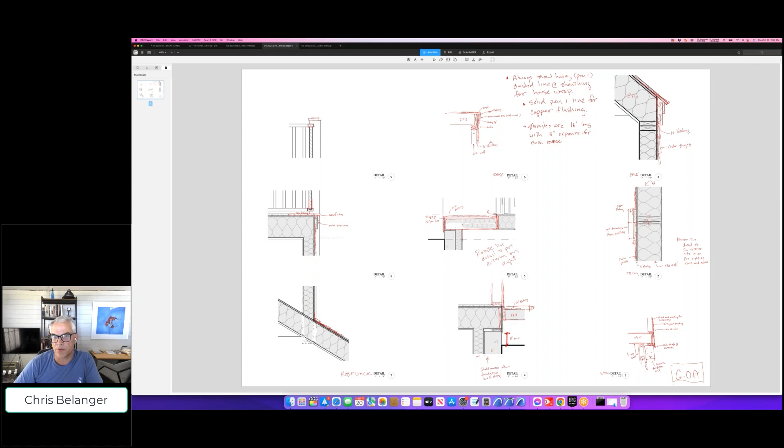Details, marking up, drawing details. And most recently on the project we were just looking at, there's an electrical plan, so I'll mark this up, give them a few key elements of it, and let them go to work. That is this project, as I said, that we're just looking at.

The things that I found is giving really clear inputs—I think Brian mentioned this too—on my end for them gets the best results. A kind of funny example just happened the other day.

I sent some general instructions that we need to update all the outlets on this project. The next day I came back and they said, it's great, we finished almost all of the guest house. I didn't realize that I hadn't told them—because they haven't worked on the project in a little while—that I'm focusing on the main house now. So the work they did was great.

That was really on me, to make sure that I, as a person—and probably most of the people listening here are the clients—we have that broad range of knowledge. We know the project, we know the priorities, we know all this stuff that we probably don't even think about. I found that it's important for me to take the time to understand what of that knowledge needs to get conveyed to them so that they can do what I'm expecting. The more time I put into that up front, the more efficient the whole process goes. Not that it takes a lot of time, it's not daunting, but you do need to set aside some time to do it correctly.

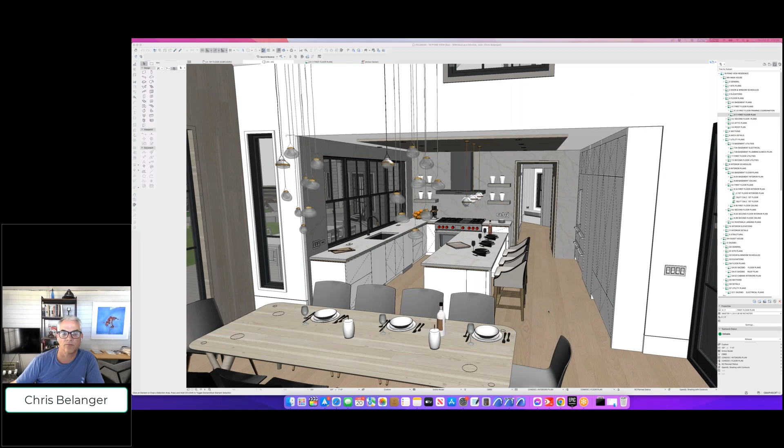If I can use this opportunity, I would like to thank Chris for sharing his experience and for working with us, because it's the first time we are talking face to face. I'm really thankful for this, your feedback, and I hope that we will be working for many years ahead still.

I'm sure we will. Yeah, so it's interesting. I think Chris, you might have mentioned - it was either you or Brian said, I've never talked to them. I've just always typed messages through Skype or email, or directly inside the project file, which is interesting. You're seeing all the rich detail in the model and you're communicating through visual means, but you don't actually necessarily have to be on the phone or in a Zoom or other type of meeting.

Right, yeah, that was me. This is the first time I've seen Rufus face to face. I've never had a Skype call, never had a phone call with anybody there. It's all been emails and sketches, and it's worked really well. But I got to say, listening to Brian, I think I need to start doing some videos and might even consider a Skype call. That sounds pretty useful.

Well Chris, from our experience, we can say that those people who are communicating directly and talking with Skype, spending even 5 or 10 minutes - because a short conversation can save a long email. Yes, yeah, that's just what I was thinking, listening to all this. I think that's a great idea.

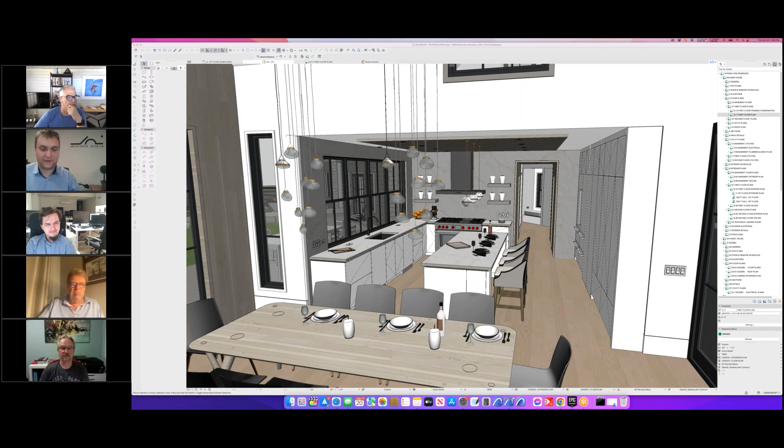Okay, so Rufus and Marius, any closing comments? I just want to, as closing words, thank all of you who took part and spent their valuable time during this meeting, and just to say that there are two sides of this issue. One is technical - there are tools that allow to work in such ways - and another is psychological: to overcome your shyness, overcome your circle of comfort, and try to start working in a bit different way. So I'm really glad that all of us have found a way to work together. And once again, thank you for your time.

Marius? Our pleasure. As for my side, I just want to thank all of you, and it's been a pleasure to work with you. We are really enjoying your projects, and most of the projects are really complex, interesting, and it's a challenge for every one of us to do a good job.

Yeah, let's do that. Well, I know that you all care a lot. That's what I've gotten from all of the clients that I've talked to - you go the extra mile, you're very conscientious and very expert. So that's all important criteria when you're working with a team, a staff member in-house, or outsourcing. So I hope all of you who joined us today and who are watching this recording have found this useful. I think that taking the time to work on your business rather than only in your business will pay back manyfold.